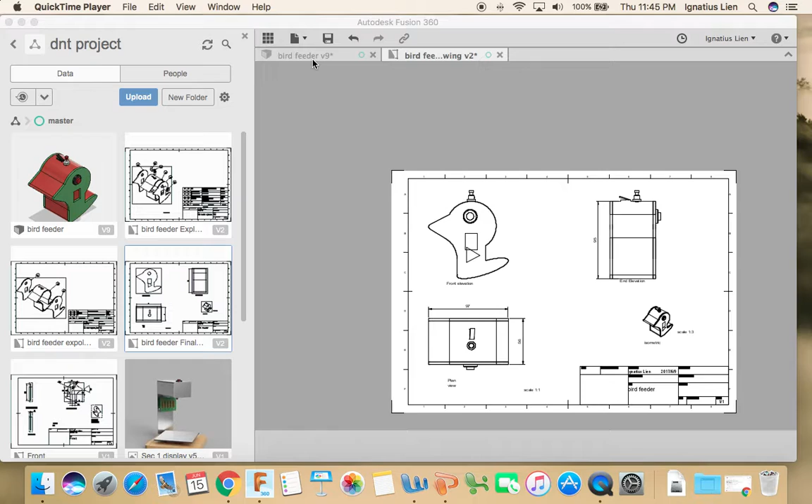So this is what it looks like. What we're going to do from here, you can switch off the joint to get rid of this. Make sure all these are switched off because you don't need them.

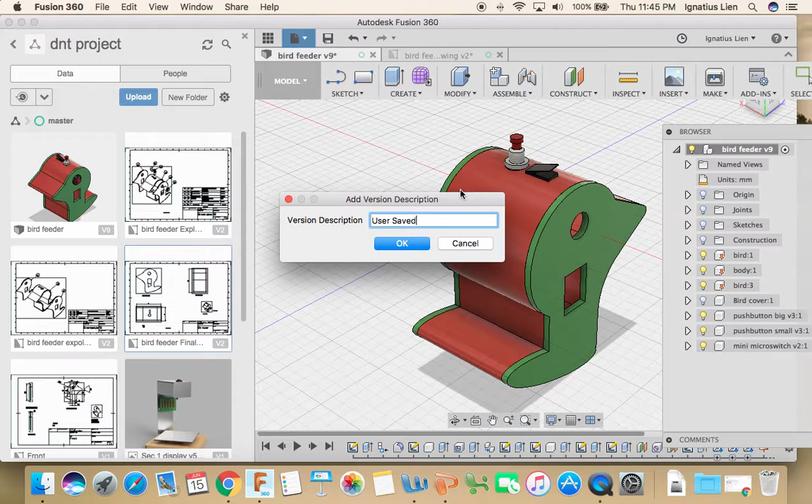To start off with, we are going to start a new drawing from design. It will prompt to save it. This one you are supposed to save as A3 size, from scratch, and it's full assembly.

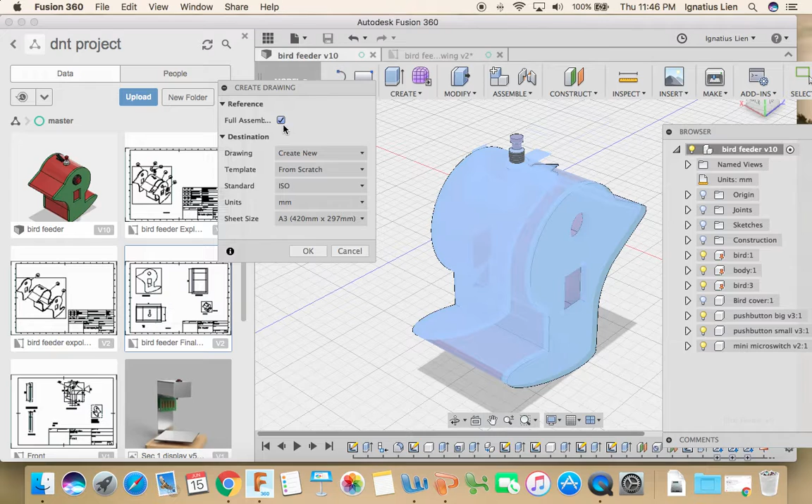Previously I gave a lesson on part drawing, which is untick this and select the component, but today we are going to do full drawing, which includes everything in. Now what this will do is it will include all the components into the drawing.

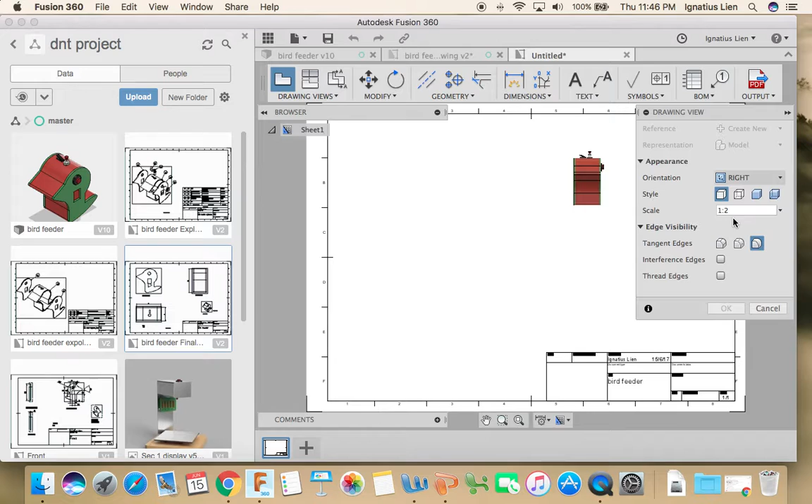So now if let's say you don't like this front, you can change to the right view here. You can also change the scale to make it a bit bigger, so let's choose 1:1. Click onto here, click OK.

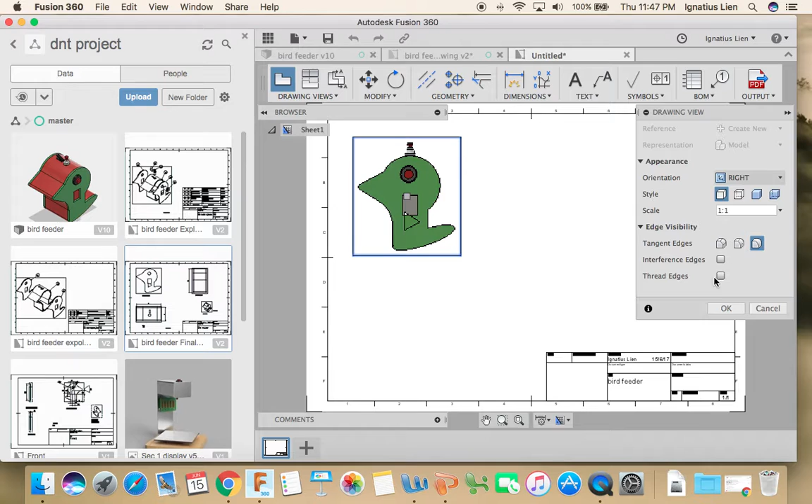Now for the assembly drawing, final drawing is normally the visible edge. You generally do not want to see the hidden line. If you need to, you select the second one. So you click OK here, and let's turn off this.

Put on projected view, select this here, 1, 2, 3 left clicks, and OK, right click to OK.

Now if this is a bit too big, you can always resize it to maybe 1:2. And if you notice that if you select this, maybe you can resize to 1:1.5 to be slightly smaller.

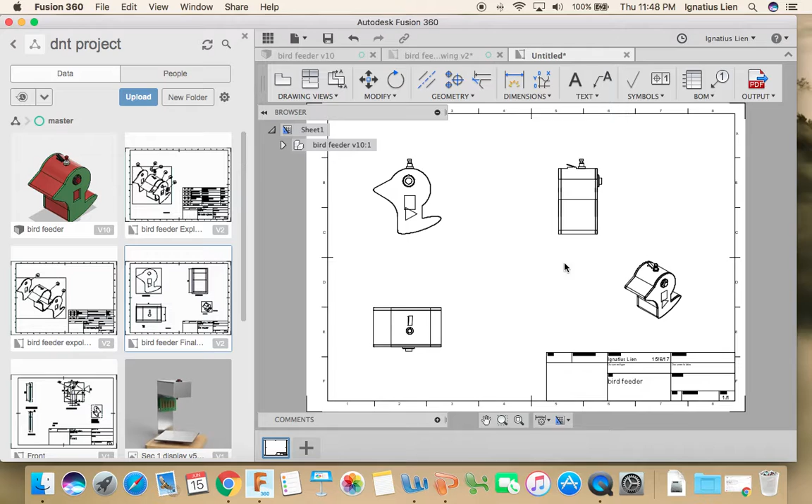Alright, now if you need to shift it, click in the center, so click and hold the center and move it to the left.

So now, so what you need to do for the final drawing is to add a few things. Number one, you need to add the view. So this is the front elevation view.

This is the end elevation view, and this will be your plan view.

It's the same with your part drawing, except that now you just make sure that is for the whole assembly.

Now for the, you need to include the isometric view here. So this is the isometric view, and these three views are known as orthographic, whereas this is known as isometric.

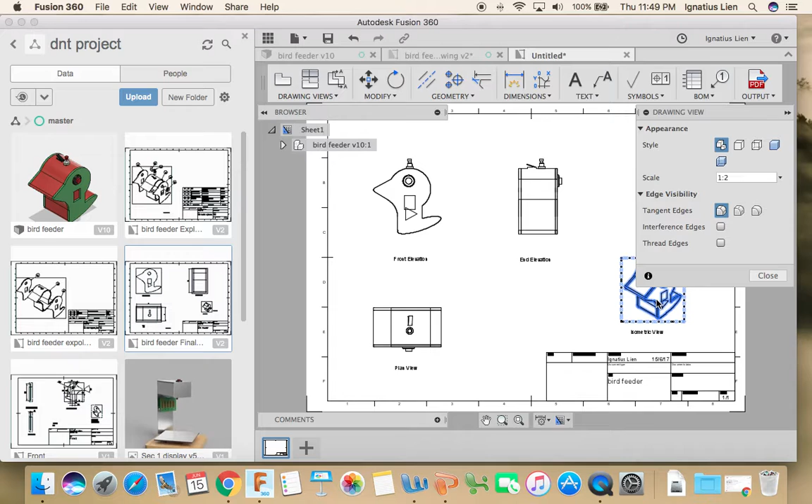So the scale, this is 1:2, so you can put in a scale here - one is to two. The scale here is 1:1.5, so you can put in another scale here - 1:1.5.

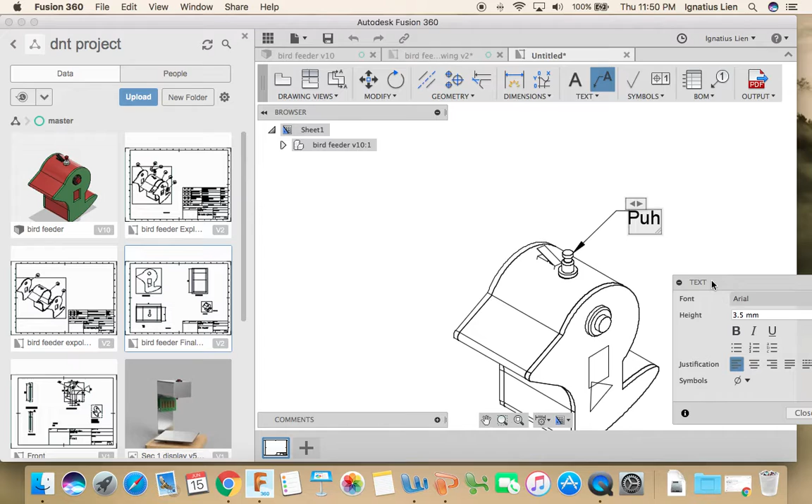Under the isometric view, sometimes people tend to put in other details, like for example switches. So you can say push button to activate a motor, for example.

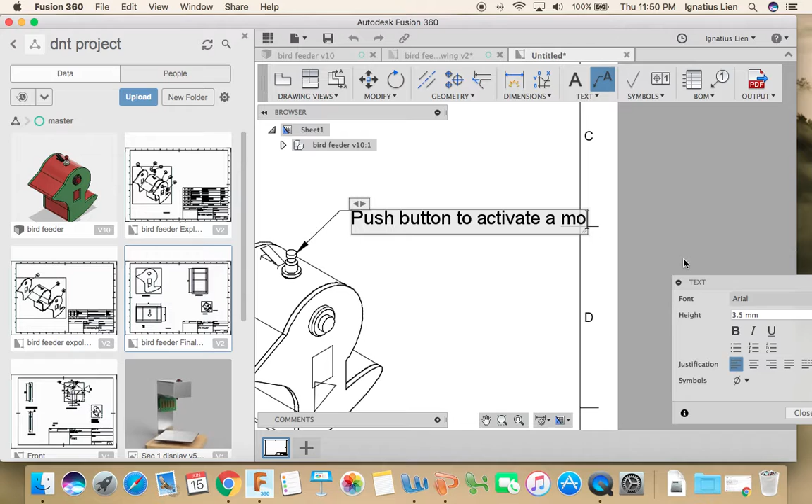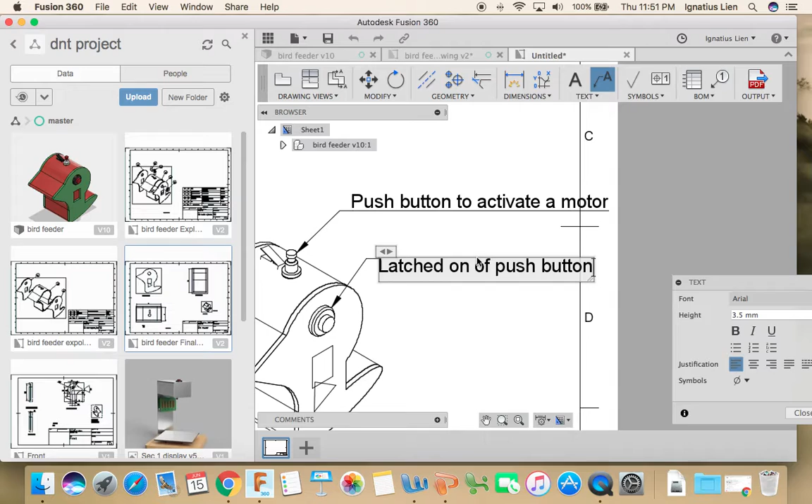You can also add maybe like this, latch on-off push button. This can be a micro switch to stop motor.

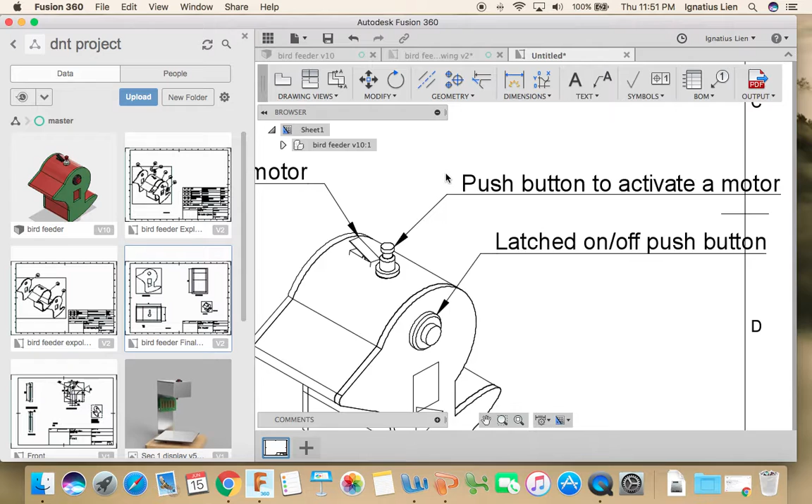So you can give some details to how the project works. Then you can get rid of the date.

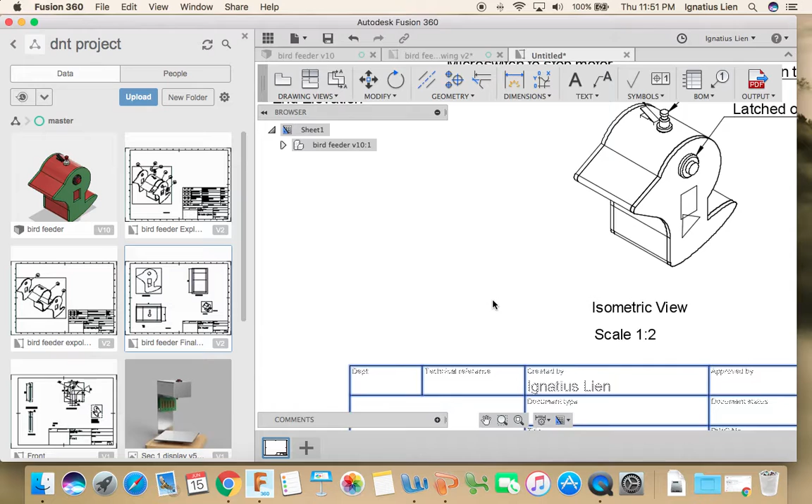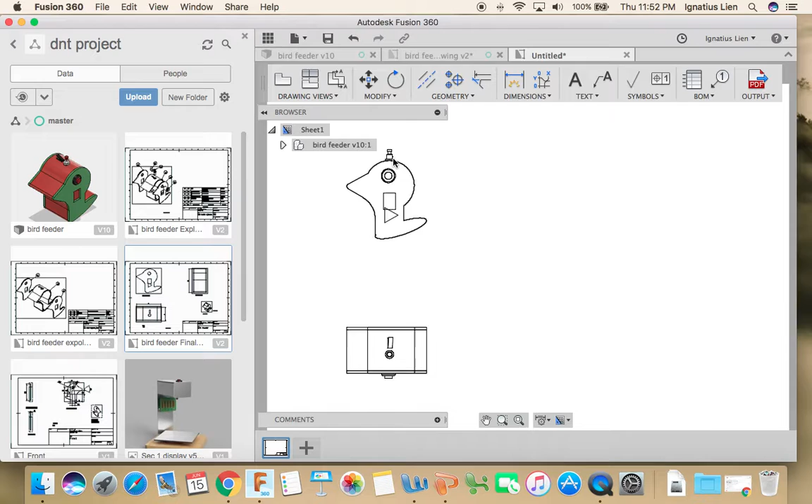Now for the final drawing, what's important is the length, width and height of the project. So under dimension, there's a few options. You can choose linear dimension and you click the highest point to the lowest point.

Again, you can press escape, double click and you can change it to 0. So now you have the maximum height of the product. You want the maximum width of the product.

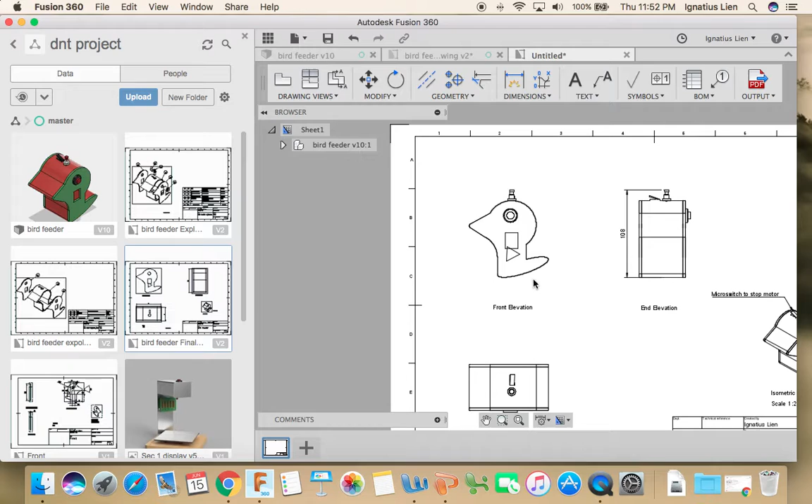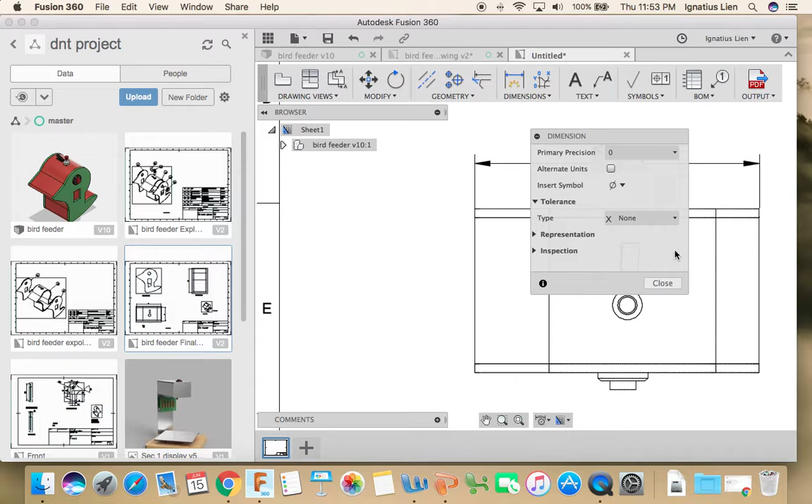You can select this, let's escape, click on again, zoom in, use your roller to zoom in and out, click on this, bring it up, press escape, again press 0.

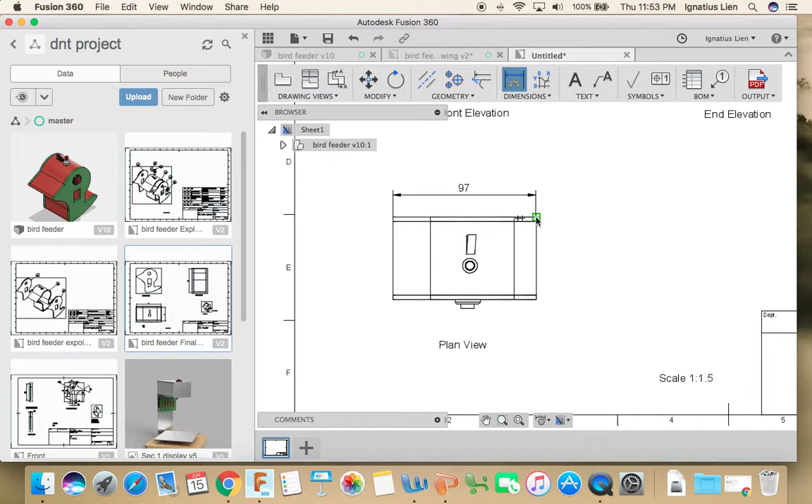And you can also do this is the maximum width, you got the maximum height, you want the thickness, which is over here. Press on dimension, select this line and this line and click here. You might want also this line and this line and click, so it covers the button as well.

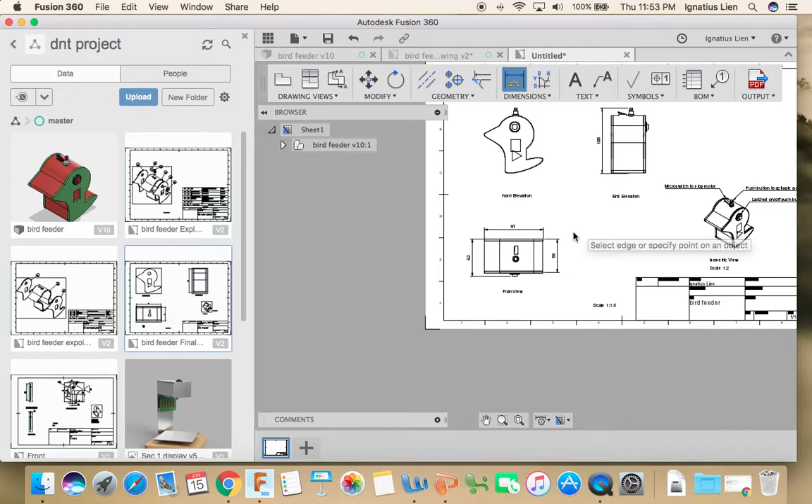Now if you got hole and buttons inserted in the hole, you don't have to dimension that. However, if you have hinges that is glued on, for example, if here there's an opening and you got hinges, you must tell the user or the producer where to stick the hinge. So you need to dimension the hinges. Anything that is glued on, you need to dimension the X and the Y. Anything that has a hole and inserted, you don't have to do anything.

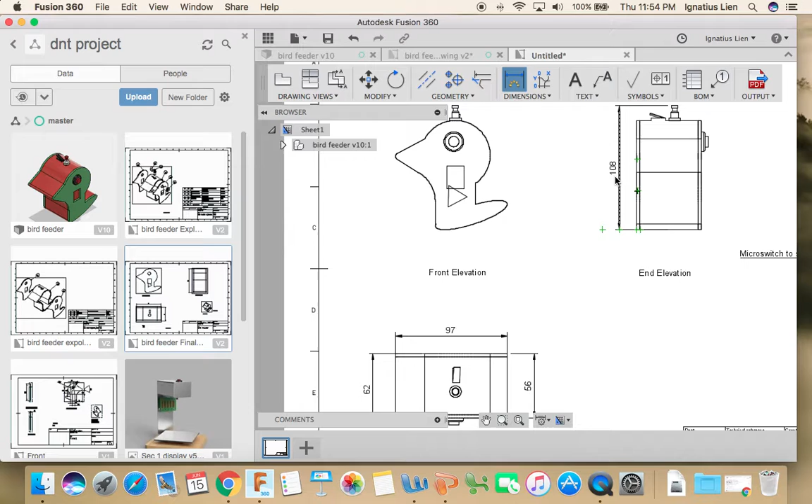And you need to tell me the maximum length, width and height. Try as far as possible to keep the dimension even distance spacing, and every view to have one.

In this case, I did not manage to put one dimension here, but it's alright.